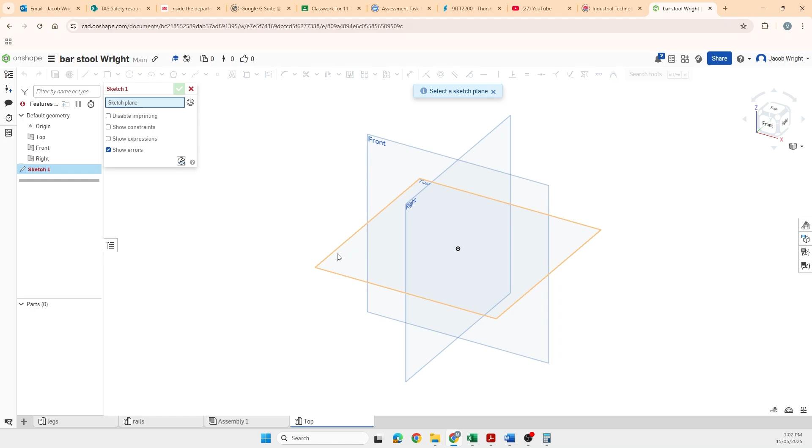I'm going to use my center point rectangle, click in the center and then click again, and it's going to allow me to input some measurements. I'm actually just going to accept the measurements by pressing enter twice for now.

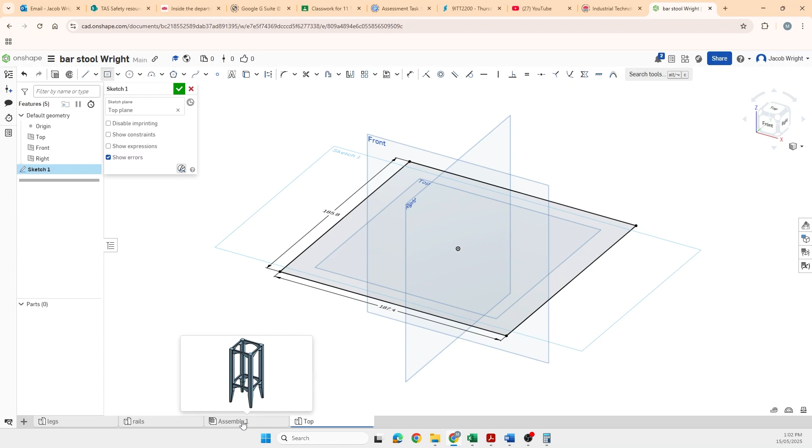To know what measurements we need, we're actually going to need to take some measurements off our assembly. I'm going to open up the assembly again by clicking on the tab down the bottom. In the bottom right hand corner, I've got three buttons I can press. One of them is show measure details, and I'm going to click on that one.

I need to know the measurement from the inside edge to the inside edge of my legs. I also need to know the measurements of my legs themselves, what stock has been used. I know that the legs are 42 by 42 square stock, so I'm going to keep that number in the back of my head.

I'm then going to measure by clicking on the line here that is the top edge of the rail, and you can see in this measure section in the bottom right hand corner, it comes up with 200 millimeters.

So I know that the top of my chair needs to be that 200 plus 42 on one side and 42 on the other. I need to add those three measurements together, plus any overhang I want for the top of the stool. I want about a 10 millimeter overhang all the way around, so that's 10 millimeters on either side, and I need to add that in as well.

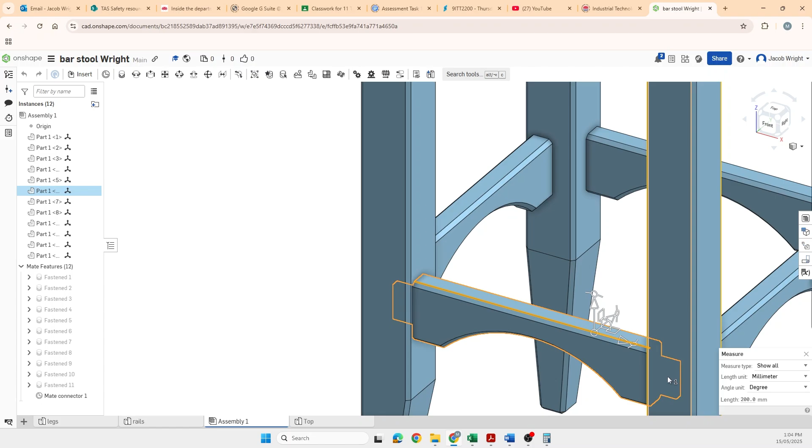So I'm going to get my calculator up and input some figures. I know I need my 200 millimeters, so I'll type in 200. I'm going to add 42 for one leg, add 42 for another leg, and then add another 20 millimeters, that's my 10 millimeters of overhang on either side of the stool. And I get a measurement of 304.

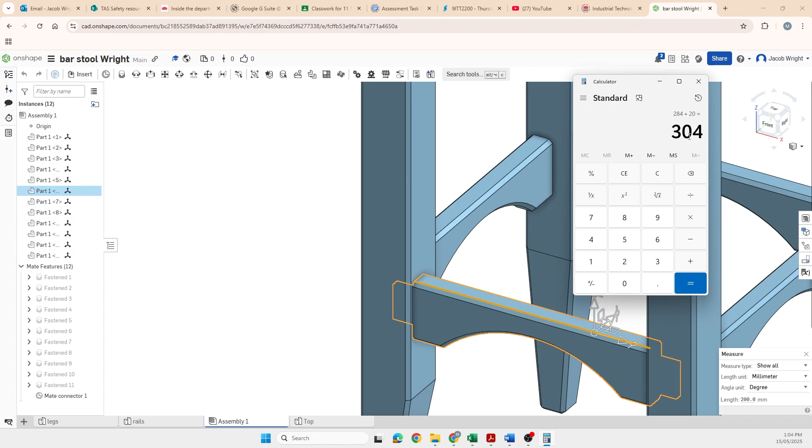So that's going to be the measurement, and because this is a square stool, it's going to be 304 by 304, the square that I need for the basic shape of my top. So 304, now I can go back to my top.

I'm still in that sketch. I can double click on the measurements I want to change and type in 304, hit enter, double click on the other measurement, type in 304 and hit enter.

Now if I want to come back and change the size of the top after I've put it on in the assembly later, I'm going to come back to this original sketch.

I can double click on it and change that measurement at any point to make the top bigger or smaller, or even change the shape. If I wanted a more rectangular one, or wanted to add some curved cutouts, I can always come back and change it in this original sketch.

Once I'm done with the sketch and ready to turn it into a 3D object by extruding it, I need to click the tick to accept the sketch.

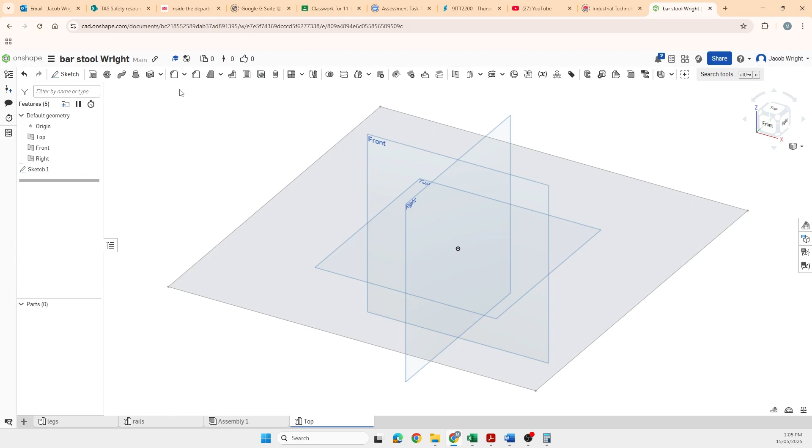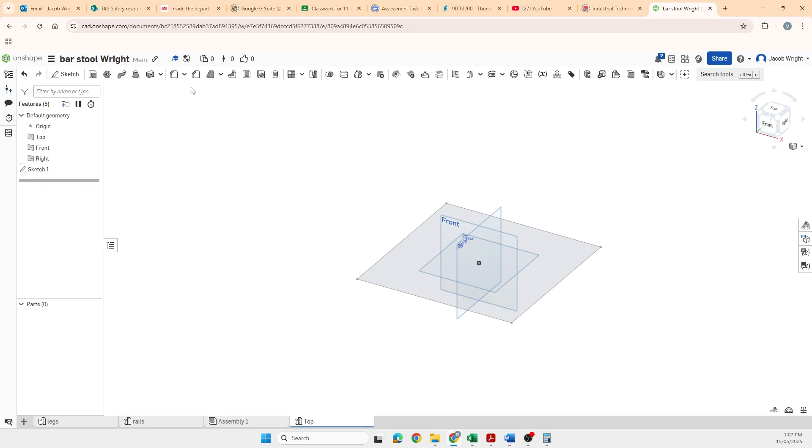So then it's time to extrude the shape. You've got two options for this. Usually you can just click the extrude button and then click on the shape. At the moment it doesn't want to highlight that shape, which is a problem you can run into at times. So to mitigate that, I'm going to get out of extrude, come back and click on the shape first so it's highlighted yellow, and then click on extrude, and now it's allowing me to turn it into a solid shape.

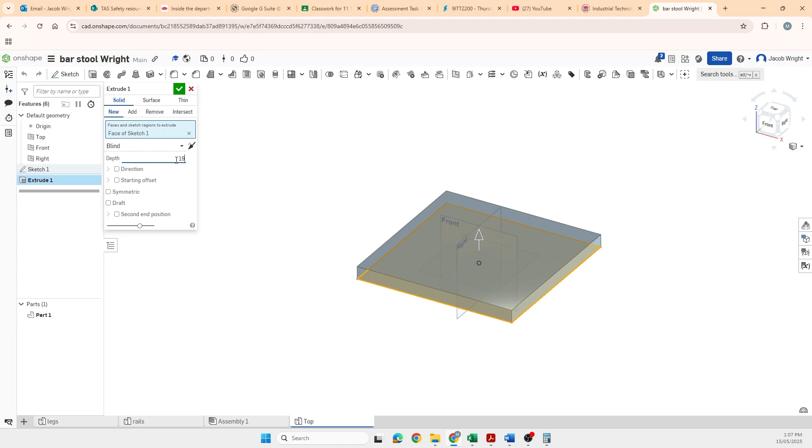I'm going to put my thickness in, so I'm going to do a 19mm thick top because that's the thickness of the stock I'm going to use to build the chair. Depending on the thickness of the stock you're using, it could be thicker or thinner, but 19mm is probably the minimum thickness you'd do for the top of something like this. I'm going to stick with 19 and hit the tick.

Now that's quite a plain top, so just to make it match the rest of the assembly, which has mostly got chamfers everywhere, I'm going to stick with that theme. I'm going to go back to the top, select my chamfer tool, and just click on that top square. I could go around and click each individual edge, but it's much faster to just click on the entire square. Then I just need to type in how big I want that chamfer to be.

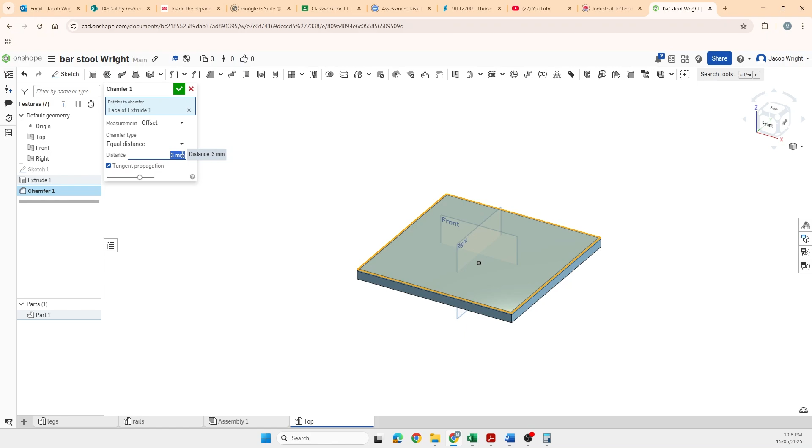I'm happy with the default 5mm, but I could have a look at what a bigger one looks like. So there's a 10mm chamfer. I could do a 15mm chamfer, leaving almost nothing on the bottom. I could do something really little like a 3mm one. So you can play around with that and see what you like. I'm just going to stick with the stock 5mm and hit the tick to accept it.

So that's it, that's the top drawn. Super simple, I know it's 304 by 304. Now those measurements are going to be important when we go to place it on the actual assembly.

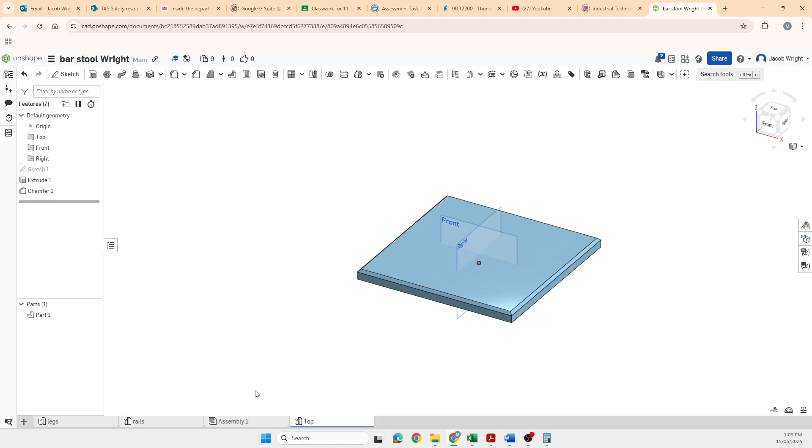Unlike what we've done in the past with putting stuff together, we don't have a clear corner, edge or point on this particular piece that is going to be touching the part in the assembly we already have, the frame. So we're going to need to do some offsetting, and I'm going to go through how to do that now.

If I click on the assembly, just like I have in the past, I want to add that top to the assembly. So I'm going to insert up in the top left hand corner, select the top, and just place it next to the stool for now and hit the tick to accept that I've added it in.

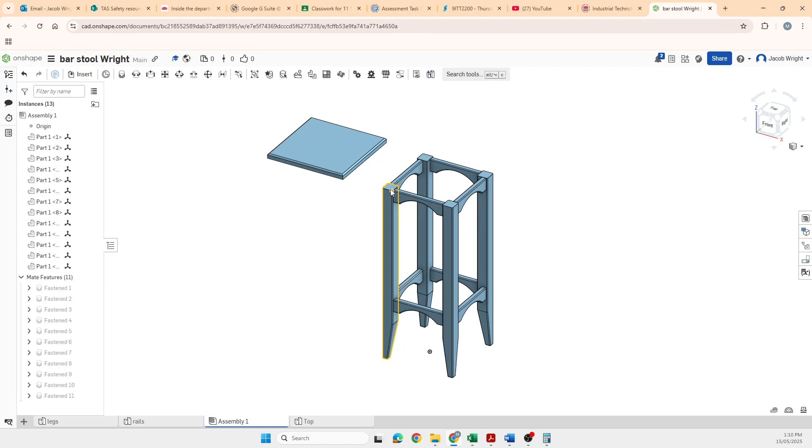Now you'll see here I've already got this mate connector sitting there. I'm just going to delete that and quickly go through how to attach this top to the frame. Now I know the measurements of this frame, so from this center point of this leg to the center point of this leg, I know that it's the measurement we had before, 304, minus the overhang, so minus 20. I know it's 284.

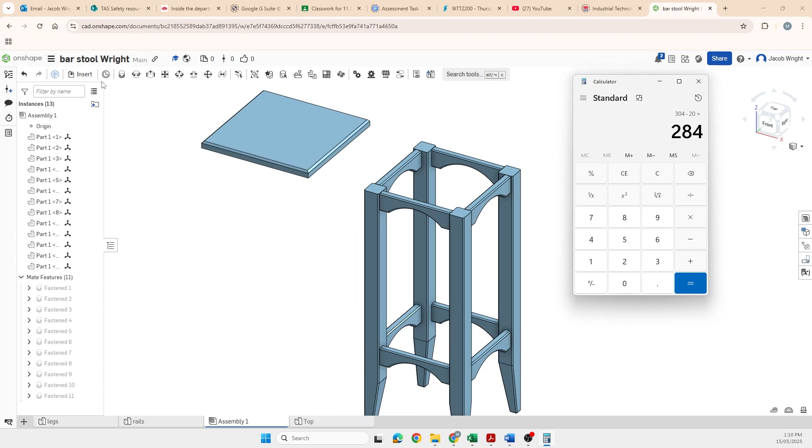Okay, so if I put a mate connector next to my insert tool, I have these mate connectors. If I put a mate connector on the center point, I'm going to have it facing up just like that, and I click, that's going to put a connector that I can now very easily use.

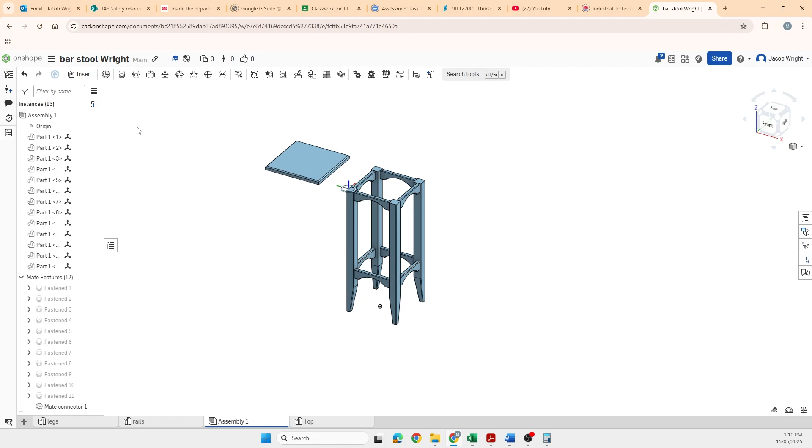If I then accept that and use my fastened mate tool to attach this bottom corner to that mate connector, I can hit the tick button. Now we can see it's not in the correct position. It's overhanging way too much on this side and up here, and not enough on the other sides.

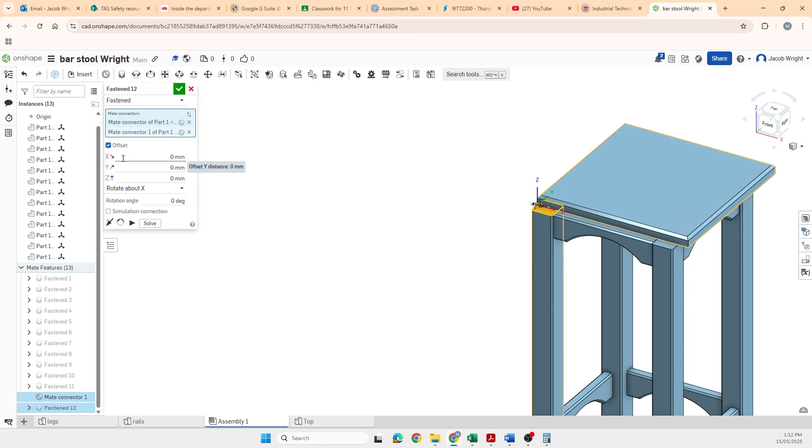But I now know, by doing some quick math, how much I need to move it in this direction and in this direction over here. So what I can do is get out of my fasten mate tool, go back to that most recent fastening that I did, fasten 12, double click on it, and use this offset tool that is selected here, and it allows me to move using the different axes. So you can see I've got the green and the red labeled Y and X, and they're the same here underneath the offset tool, and I can put a certain amount of millimeters to move it.

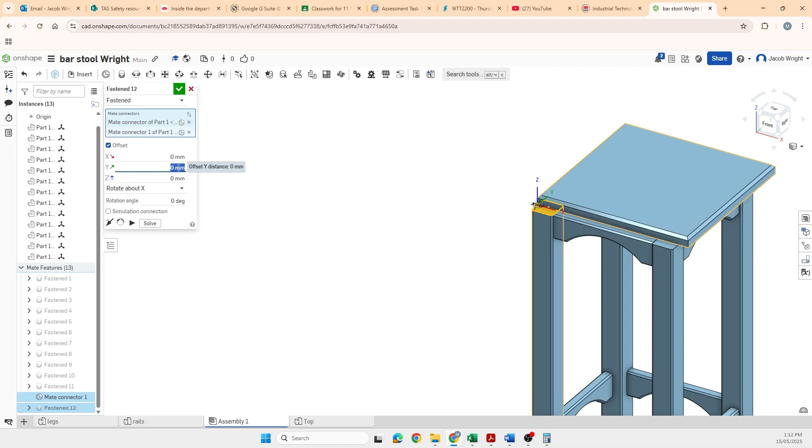So let's say the Y axis, for example. I know the center of this leg will be 21 millimeters from the edge, because that's half of the 42mm leg. So I know it needs to move along the y-axis 21 millimeters to get to the edge, and then another 10 to have my 10 millimeters of overhang. So 21 plus 10 is 31. If I type that into my y-axis, 31, and press enter, it's moved it in the wrong direction.

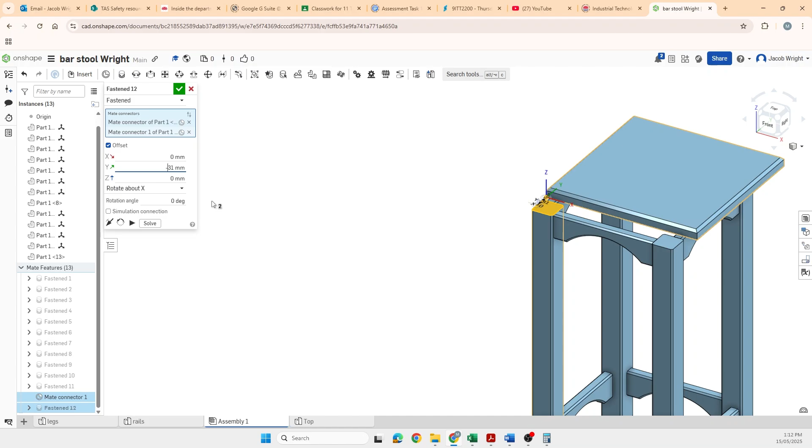It's gone positive on the y-axis. I need it to go the other way, still on that green y-axis. So all I need to do is put a negative, or a minus, which is up next to 0 on the right-hand side of your keyboard. Press enter, and it will slide it the other way. Now if I left click and rotate around, I can see that it's flush on the edge here.

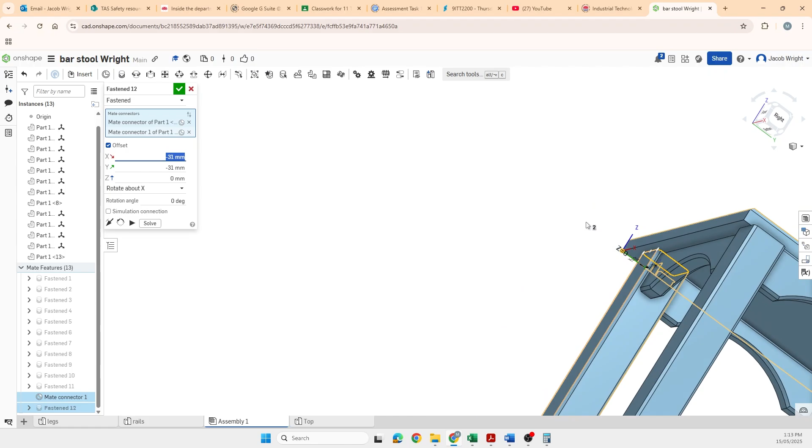I also need to do that minus 31 on the x-axis. So if I do minus 31 and press enter, it's moved it across and we have that consistent overhang. Now, looking at this, I've moved it too far on the x-axis.

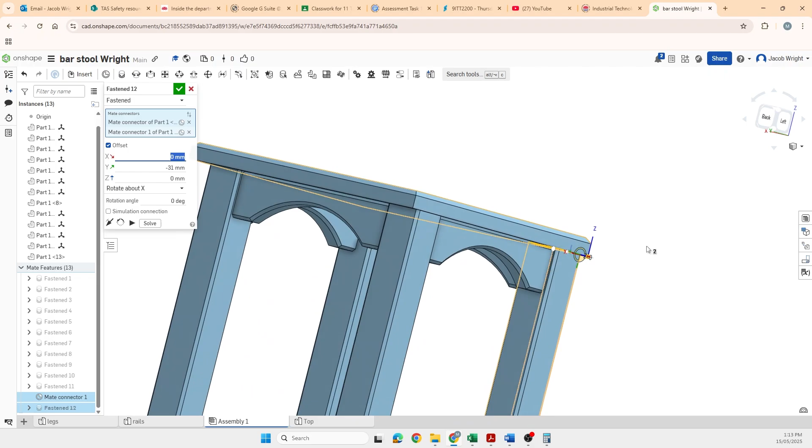Okay, so let's go back to 0 and let's have a closer look. It's right on the corner already, so I actually don't need to do the full 31. I really only need to get it the 10 millimeters of overhang off the edge. So I'm just going to put in minus 10 for the x-axis.

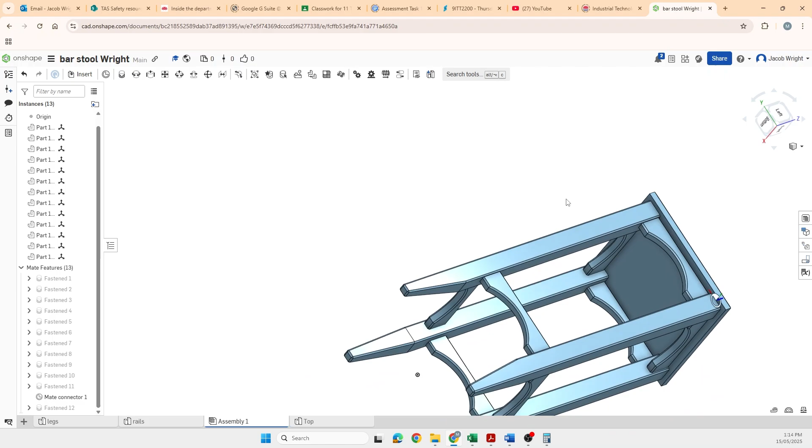And if I spin this around now, I might just quickly tick the fastening so we can have a closer look at this. We can see it's exactly consistent, the overhang all the way around. So it's just going to involve doing a little bit of math to work out how much you need to offset it from the point that you select to attach it to.

So I find the best way to do it is to put a mate connector on a central point on one of the legs, so that you know the measurements you then need to move it to get it to your 10 millimeters of overhang. And that's attaching a top to a stool—drawing the top and attaching it.

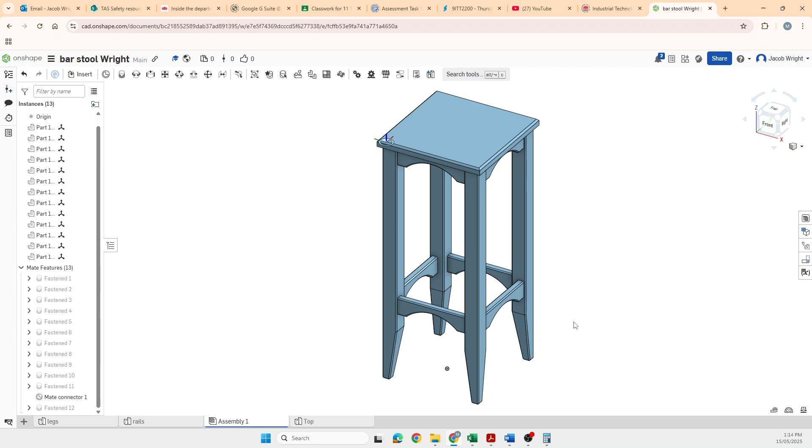In the next video, I'm going to go through how you can then draw a set of plans for this stool. And this stool is going to be made available as a file that you can access publicly, so that you can follow along and make a set of plans for this stool with me.